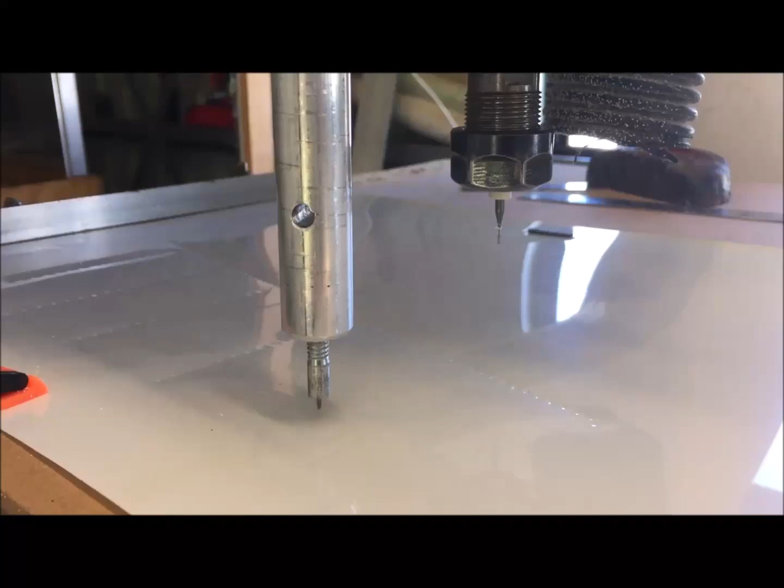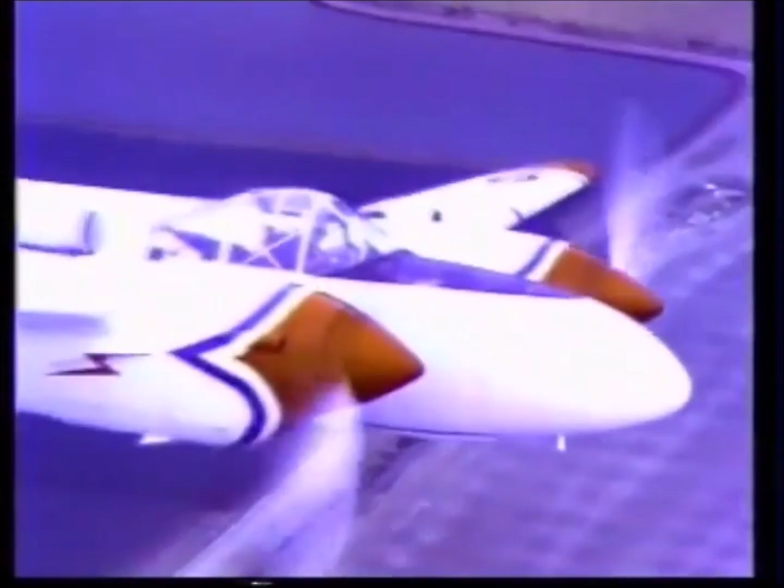I give you Lefty Gardner and White Lightnin'. How awesome is that? That's what this project's about. This is the 5th scale P-38 Lightning. It's going to be the White Lightning.

This we're actually making at the moment and about to make a mould of. And this video is about the compound panels and how we go about making the panels. All the flat ones will just be cut from a flat piece of plastic and go on. But there are so many of these really curvy, compound curvy ones, we call them specials. And this is about the process that we go about making them.

The basic concept is to extract the panel that we want to make from the 3D drawing and then create a 3D toolpath which gets cut on the CNC router backwards into a block of hard foam, and then that gets filled with plaster. So this is the foam that we use. It's just a hard foam from Bunnings.

So we pour the plaster, we end up with a plaster shape, and then we vac form over the top of this, and that forms the actual panel. Once the panel has been pulled, it gets trimmed to fit properly onto the plug into position, and the rivets have to be put on by hand using the machine, and then that gets stuck straight onto the plug.

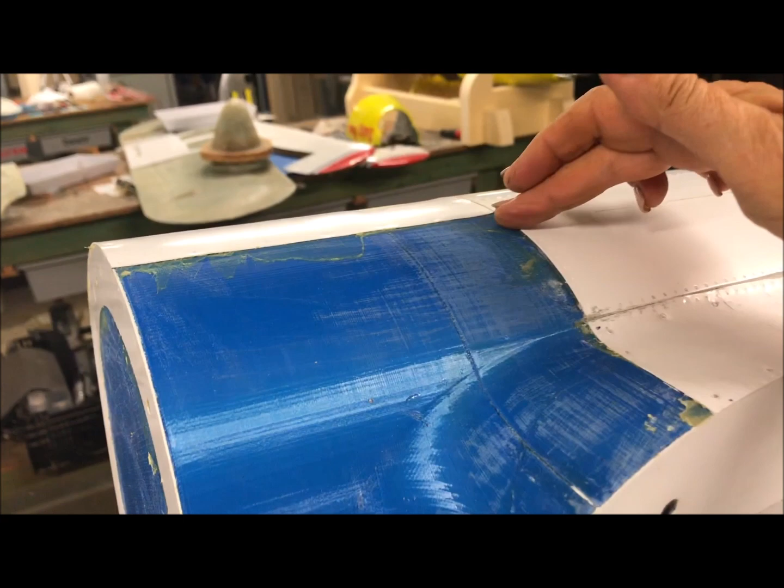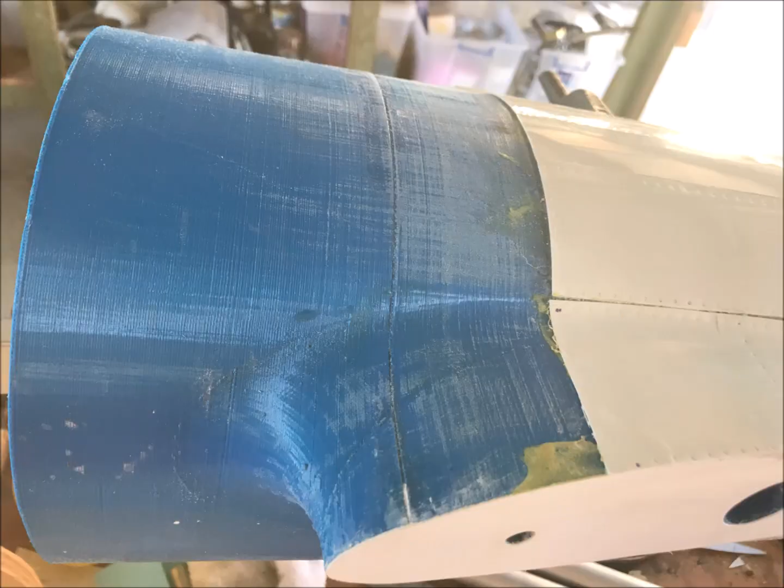The video is going to be a bit technical, and it may not be terribly riveting to a lot of you. We're going to be going through the process of using Rhino 3D, that's the CAD program that we use, and in particular MadCAM, which is a Rhino plugin that creates 3D toolpaths. So taking the extracted panel and showing how we create a toolpath for the CNC router to cut the foam.

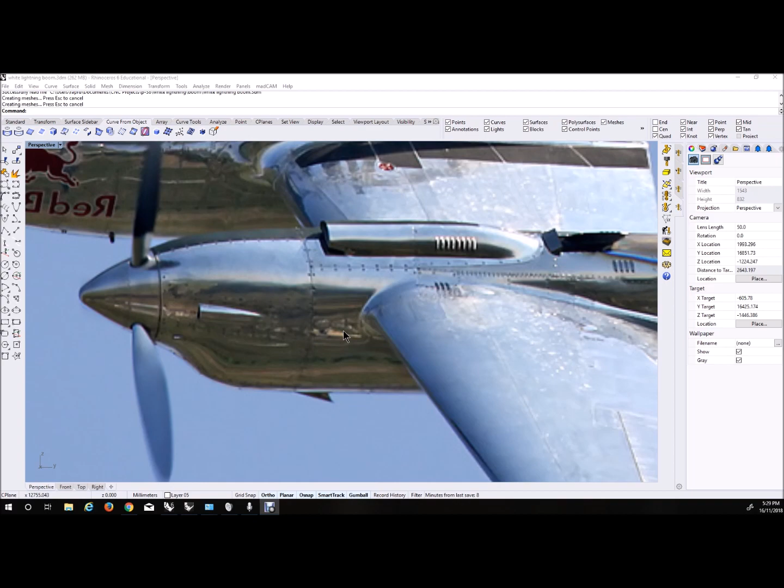And we've got a friend who's making a Grumman Duck in a similar way, and he'll be needing to put lots of compound curved panels onto his plug. So this is particularly to show him the process. So what we're doing is that panel. So there's the 3D model, and there's the panel there. So we've actually pulled it out here. So you can see how that panel's still the shape of that.

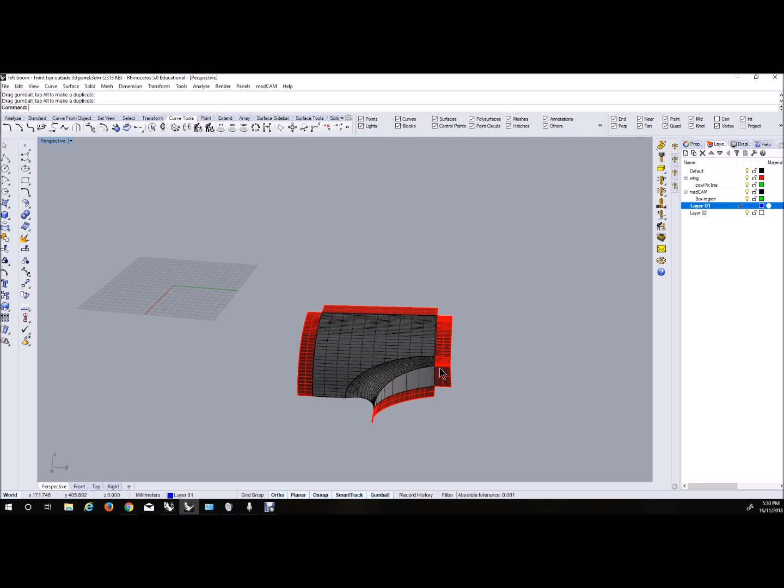We've added 20 mil to these sides already, just extended them out, so we've got a bit of pull area. So when we pull it, we've got trim area on the mould. Pull it as in vac pull it. So we're going to make a compound curved panel. To do that, we're going to make this toolpath to cut it backwards into foam to pour plaster into it. So that's what we're making.

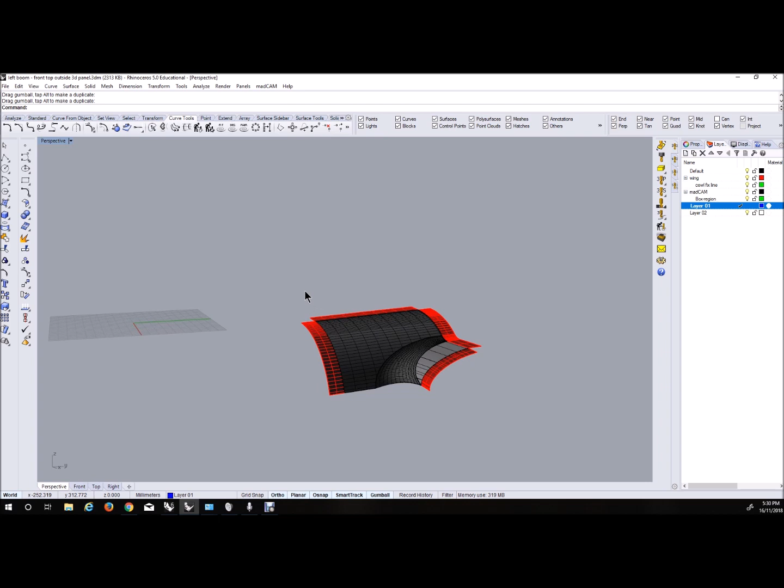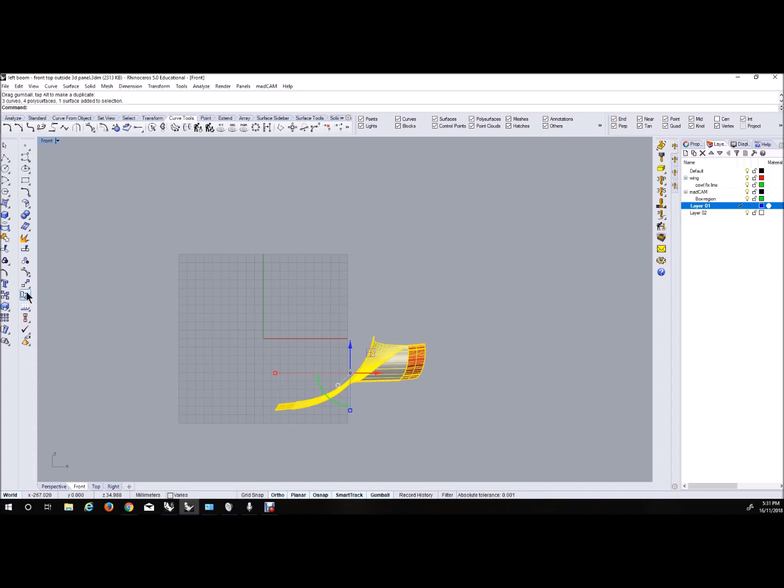So to make it backwards, we've obviously got to tip it upside down, because that's the shape that we're going to be wanting. Does that make sense? Yeah, that's the shape you're going to cut into the foam. So from this direction, we want to square it up so it's not wasting foam. We want to get it square with a block of foam, so something like that. And from right view, yeah, that's not a bad shape.

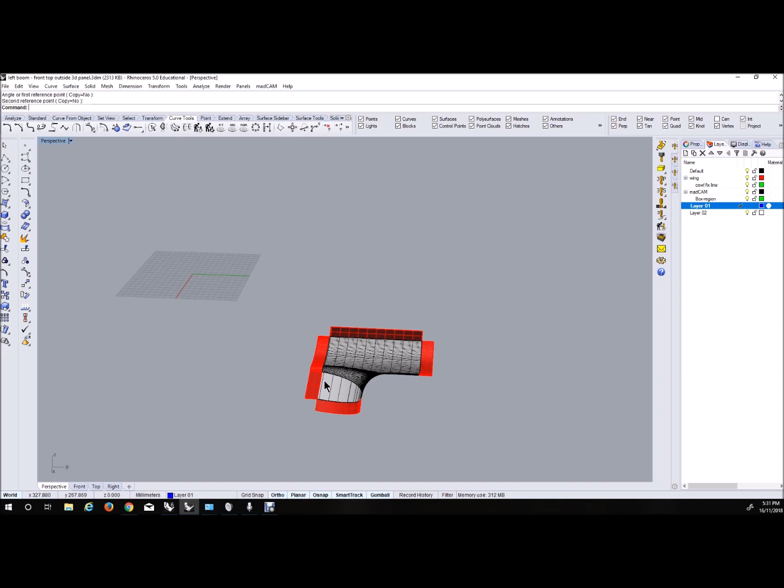So we've got that shape, but upside down. We want to fill the corners in. So we want to put a nice little curve around the corners, and maybe a big curve around this corner. So you want to fill the corners so that you're making a box that you pour plaster into. We're going to machine a flat surface into the foam, so it's got to be a nicely shaped bit, so it's not lumpy bumpy.

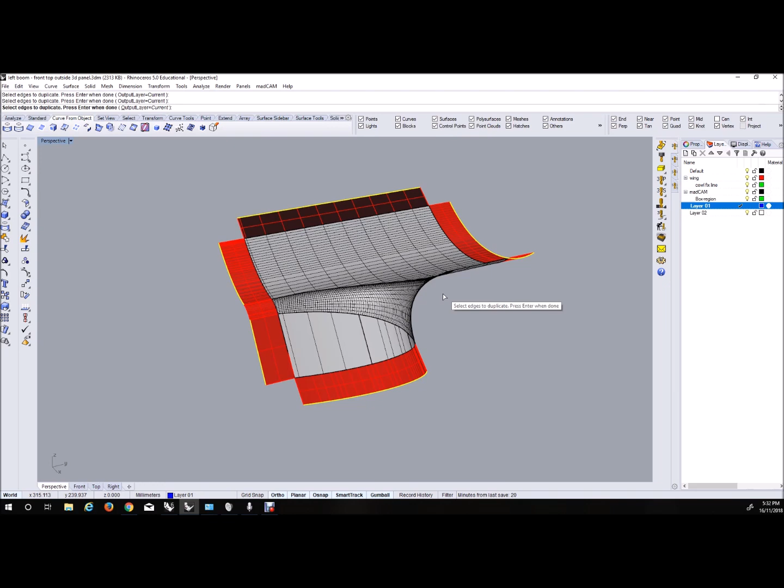So we'll duplicate these edges. There's a little ugly bit there, right on there. So we've duplicated those edges, joined them up, and then we can use arc blend. So from there, curve, we'll go up and just select curves in the filter. So curve, curve, puts a nice little curve in there, joins them up. So we go around all the corners and do that.

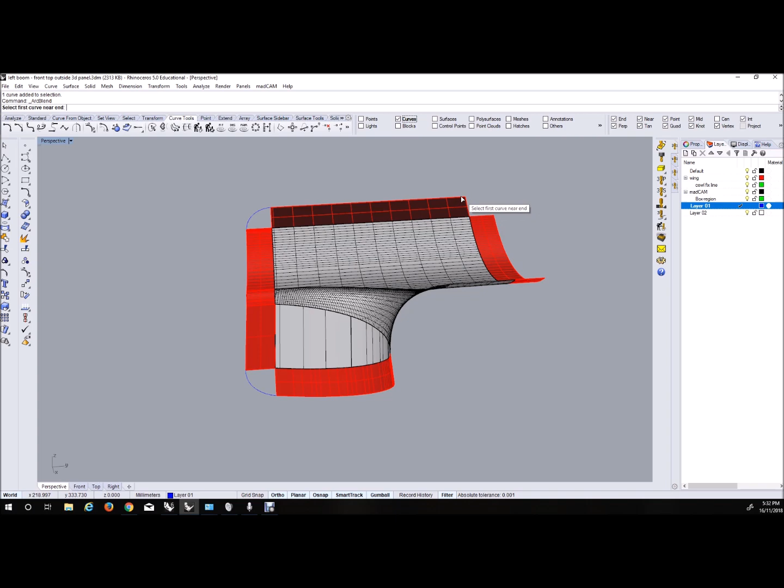Hit enter, reselect. This one's going to be a big curve. So we're going to go from there to there. Hopefully not too high. That's probably a bit high. Can you just turn on the points and push it down? Well, so many points it's put in there. No, we'll just trim it off afterwards, I think.

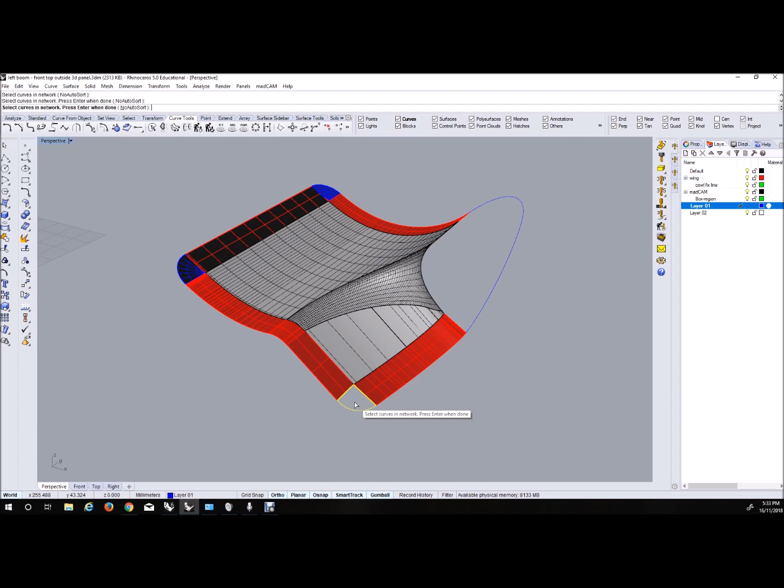So then we want to fill those in with surfaces. So surface, curve network, and you select, turn surfaces back on, that one, that one, that one, and it puts a surface in there. So again, make a surface between that edge and that curve. Done. So points define curves and curves define surfaces. So we're defining this surface with a series of curves, 3 curves.

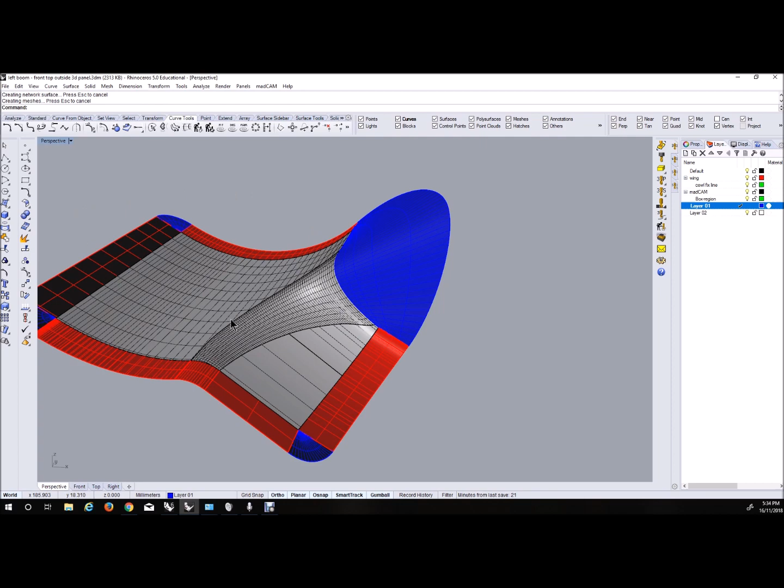And this one is going to be a little bit messier. So there's a surface, but we'll trim that down. So that's sort of the roller coaster ride that we want to cut into foam.

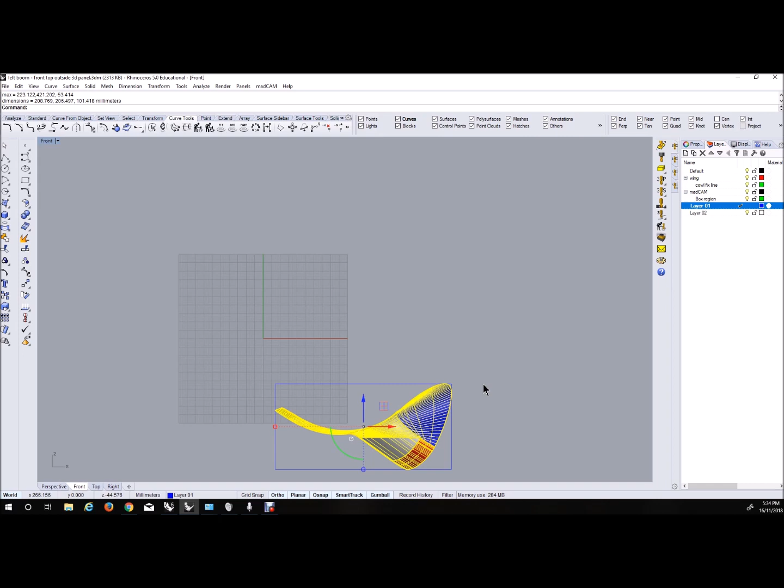Just to get an idea where its size is at, we will analyze bounding box, outputs, curves, and draw a box around it. You can see, so if we go to front view, that's way too big. The bit we're actually after is this black bit. That's just a lead out.

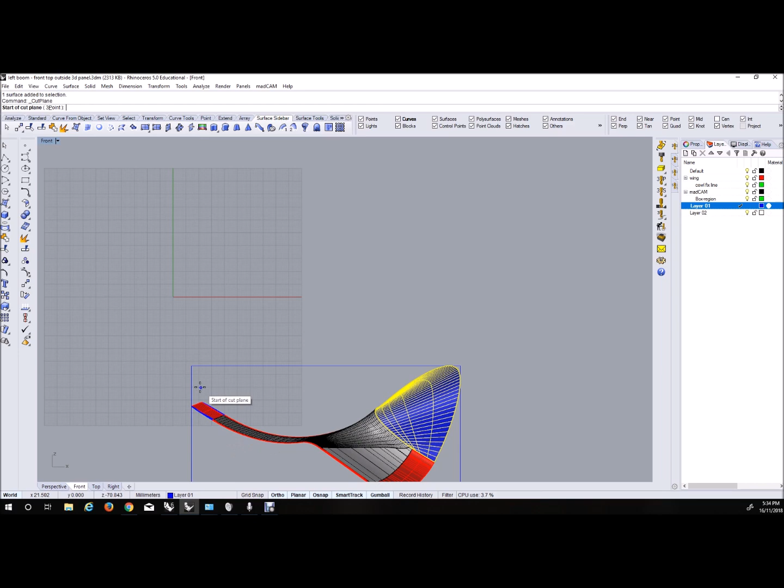So if we chop that blue bit to the level somewhere through there, so we want to chop that, so we go up and draw a cut plane. If we just go through there, that'd be maybe just a fraction higher. And then, using that as a cutting plane, so that's drawn a cutting plane through that wing,

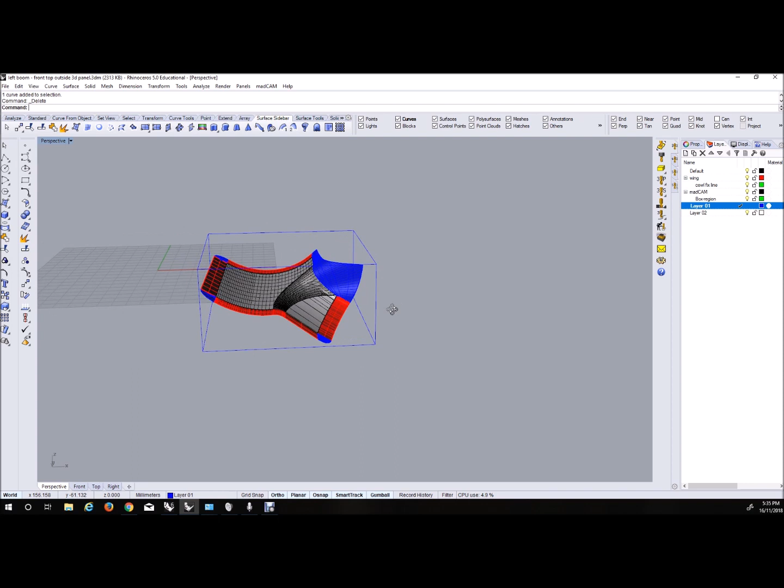and trim off that surface, and that curve will get rid of that, and get rid of that cutting plane, get rid of those daggy little bits. So that's the shape that we want to cut into foam. So that's what we want to cut, so we select it, and then we start into madCAM.

So madCAM, you work down the... And madCAM is? Machining. It's what's making the 3D toolpath. Yeah, it's an add-on to Rhino. It's a plug-in for Rhino, which creates 3D toolpaths within Rhino, and works within Rhino itself. So it's here as another menu. It's like a separate menu in Rhino.

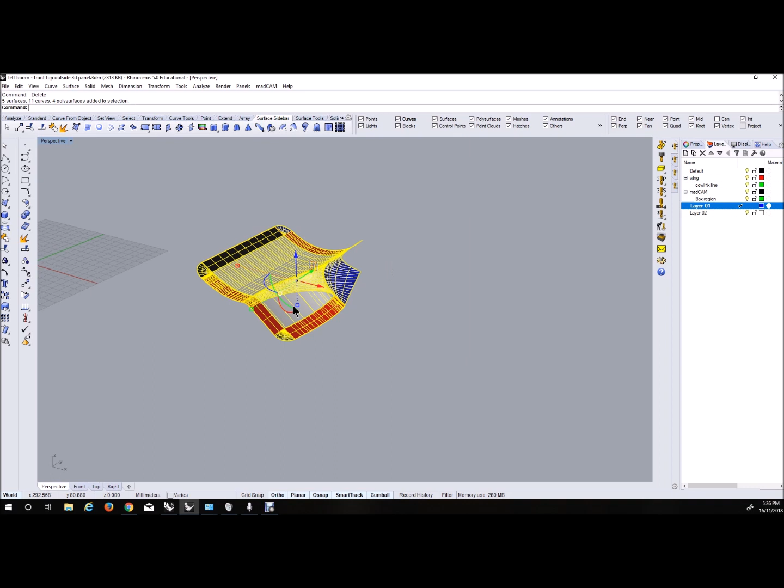There's 3, 4, 5 axis toolpaths. We're just using 3. So we've selected what we want to actually cut, which is this shape. So start at the top, select the model, and that's now drawn a box around it. For Rhino, for simplicity, our cut is going to go from world 0, 0, 0.

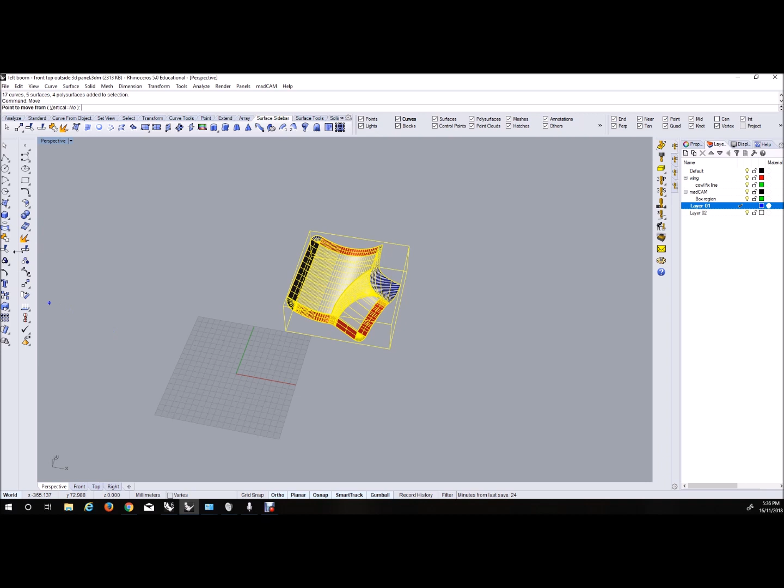So we can select this whole thing, go move, again, accuracy, snapping everything. So point to move from will be that point there, and we are going to 0. So on the construction plane, that is now set at exactly 0, 0, 0. So when we go to cut it, that's the starting point for our cutter bit. Will be at 0, 0, 0.

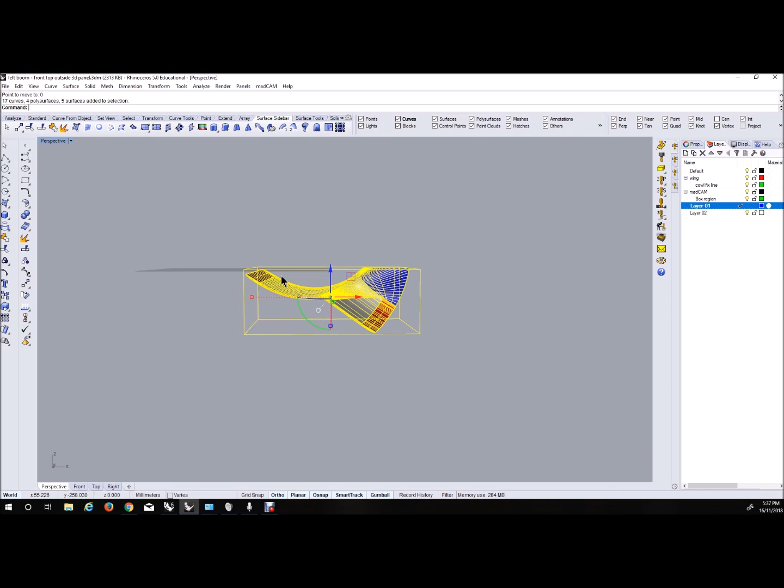So it'll go X positive, Y positive, and Z negative. It's going to cut down into the block. So that's the surface of the block, and it's going to be cut down into the block. So now that we've moved that, we've now got to do that again. So say that's the model, that's what we're cutting.

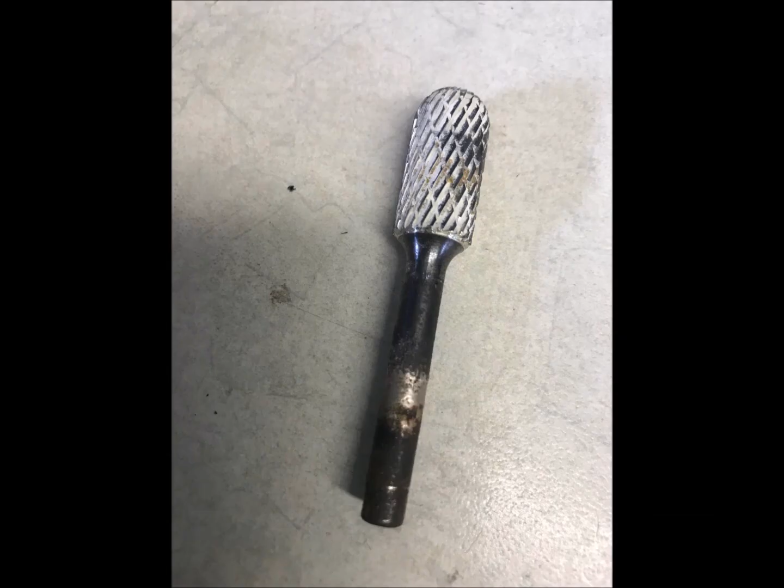Working logically down through the menu items, we select the cutter bit. We're going to cut this with a ball end 12mm. That's just a tooling choice, works good on foam. So we select our 12mm, it's going to go at 1200, 600 feed, 12mm diameter.

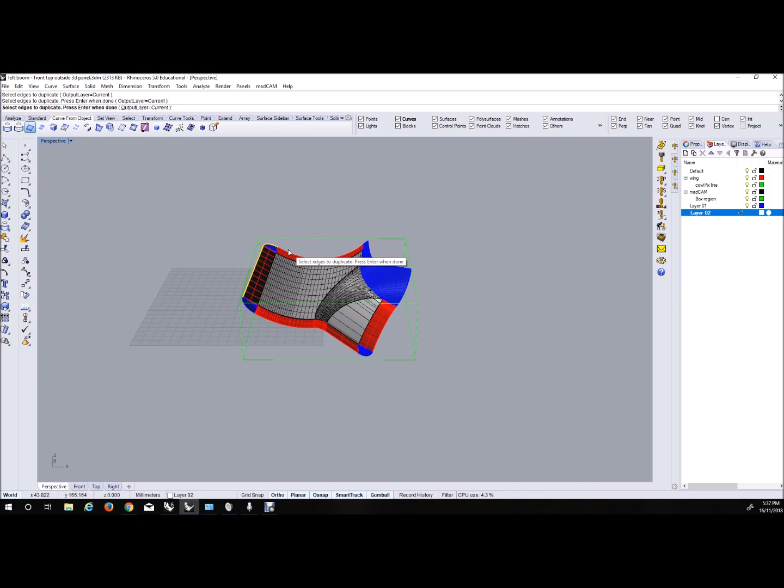Okay. We now have to give it a region curve, so it's not cutting outside what we want. We just want it to cut exactly what we've got. So we'll select another layer for convenience, and what we do is just zip around the outside, marking the silhouette of it. So we're just duplicating edges.

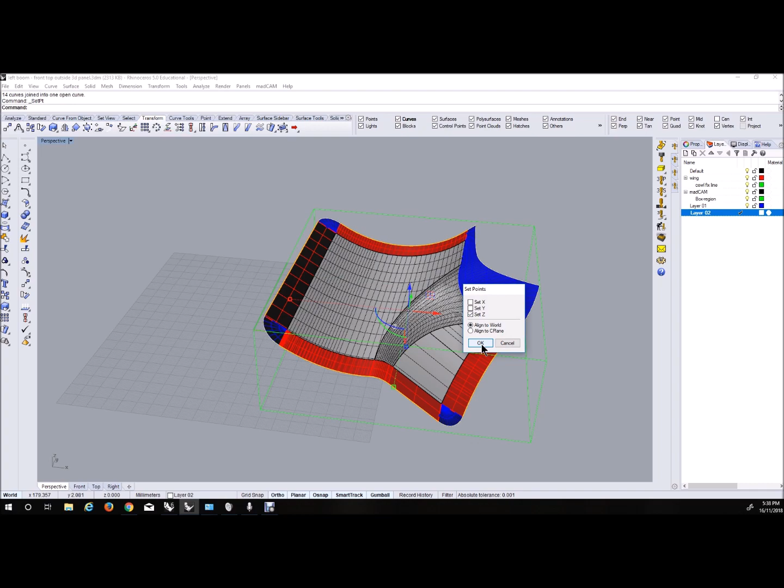Yep, duplicate edge, join them. It's an open curve, we'll get back to that. So, I didn't select that. Yes, I did. We want to bring all that now up to the top to form our region curve. So that's a transform, set points, set coordinates in the Z level. So we're going to bring all that up to the top.

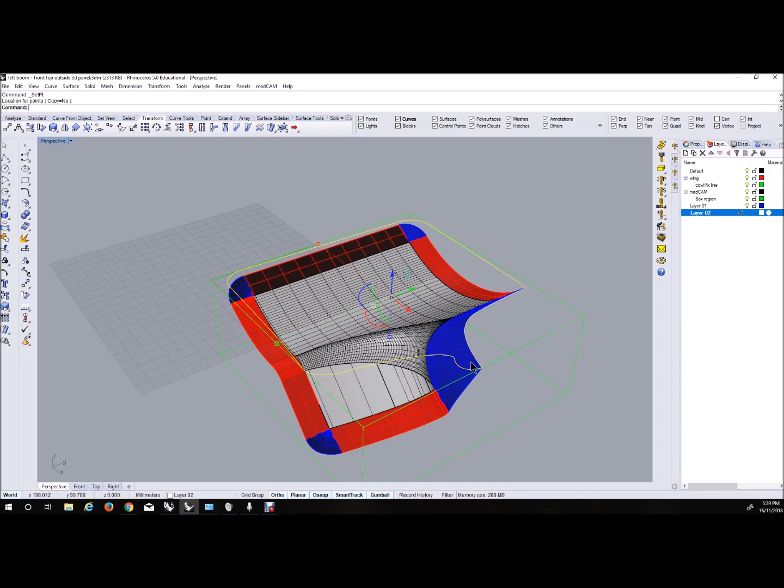You can see what that's done. It's taken that outline and compressed it in Z to the top. This may be an issue, getting a 12mm bit down there. We'll see where the toolpath goes. Not a big issue because we're not really interested in that bit, but we'll see what it does.

And you had to close it. We've got to close it. So the region curve must be a closed curve. So that curve there, to make sure it's closed, we go to curve, curve edit tools, close curve. And it's closed one curve by adding a line segment. So that's now a closed curve.

So we go across back to madCAM and go to select region curve. So this curve is highlighted. Select region curve, and that's now the region curve. So it'll only create toolpaths within that curve. So then we're not profiling and pocketing, we're doing a surface milling. So we bring that out, we can actually detach that, so we can keep it there.

So there are 3 steps that we're going to use there. There's roughing, Z levels, and planar. So if we click roughing, we're using a 12mm bit. So we're going to not step down dramatically, but we're going to hack away a bit. So 10mm step down, it's a 12mm bit, so a 6mm step over. And we're going to leave a little bit so it doesn't go right up to the edge from the roughing, 2mm. So stock to leave is 2mm.

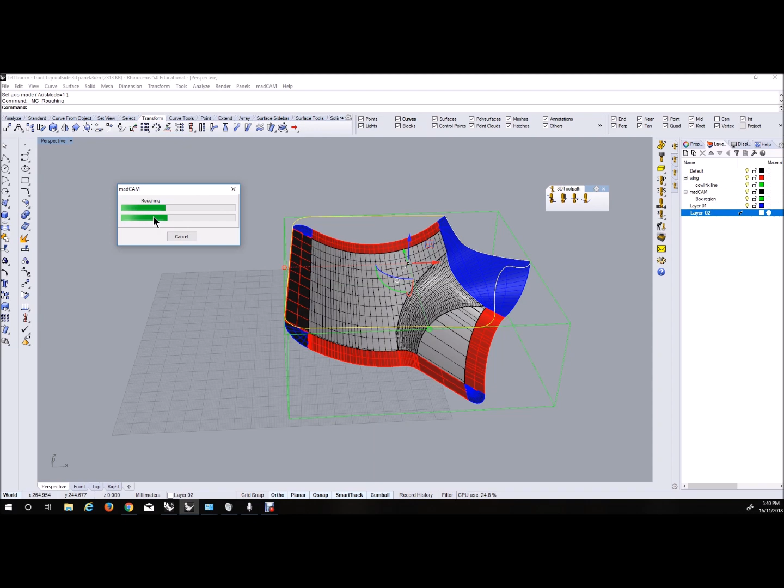And there is the roughing toolpath. So you can see how it's stepping down 10mm at a time, not going right up to the edges. So that's the roughing toolpath. So that'll take away the bulk. So if this green represents the hunk of foam, it's chopping away this bit, which is roughing out the shape.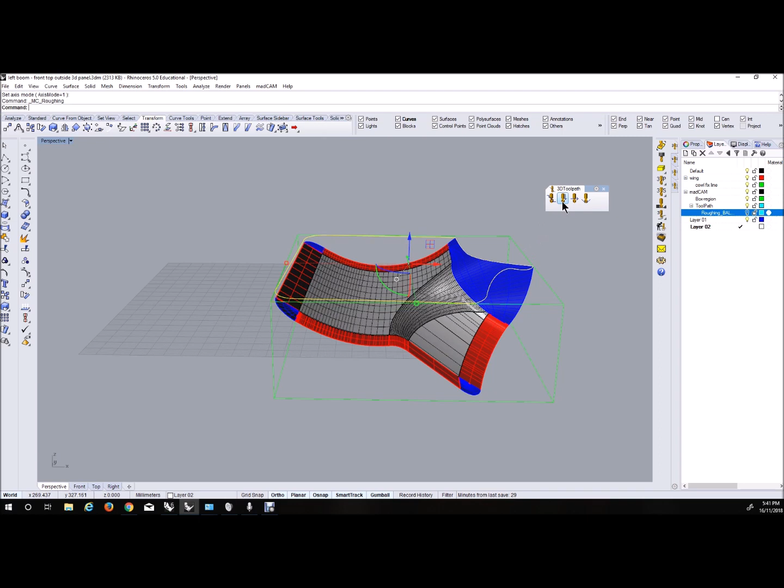Next step, you can just hide the roughing toolpath for the moment. The Z level, which will do basically vertical surfaces. 1mm step over, step down, that's reasonably fine. So this is a finishing cut of the vertical-ish surfaces. Stock to leave 0, so we want to go right to the edges. Step down 1 and we go yes. So I'll create another toolpath now, which is the vertical, which aren't that many vertical surfaces.

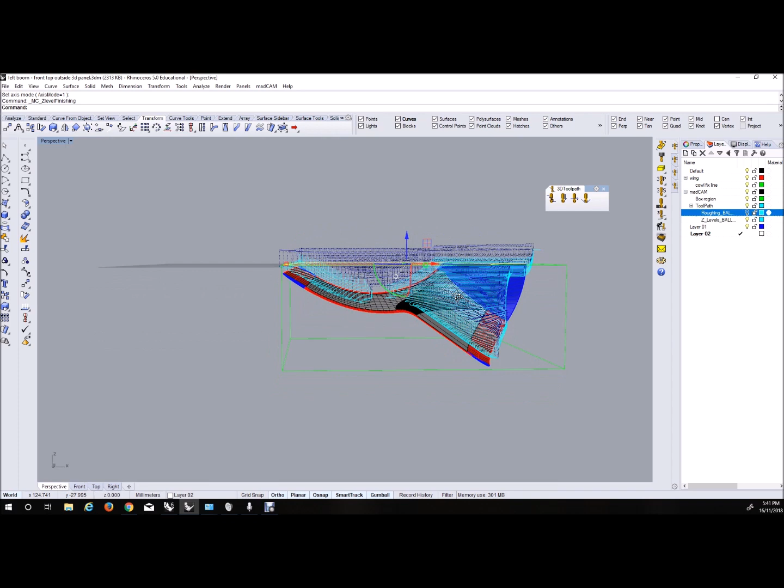And that's the Z level. So every level, starting at the top, 0, it goes down 1mm at a time, and comes up with a toolpath which joins all those levels together in a nice tight pattern. So it's stuck it over here, Z level.

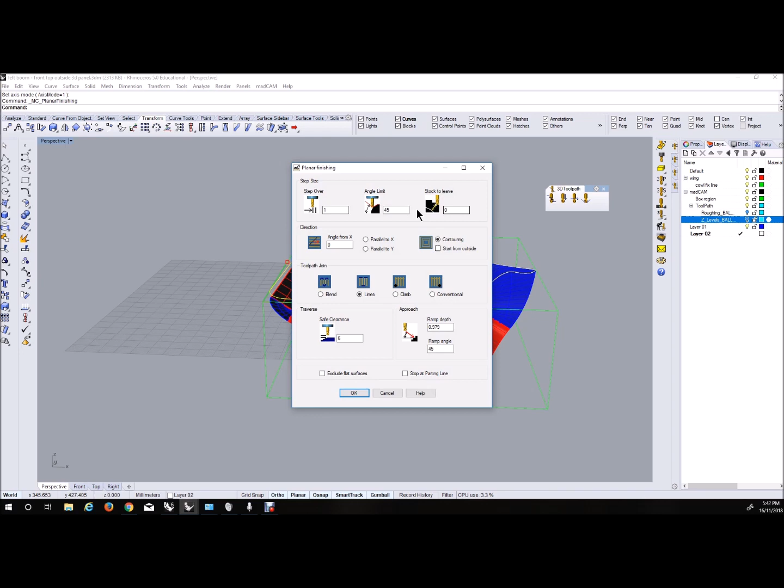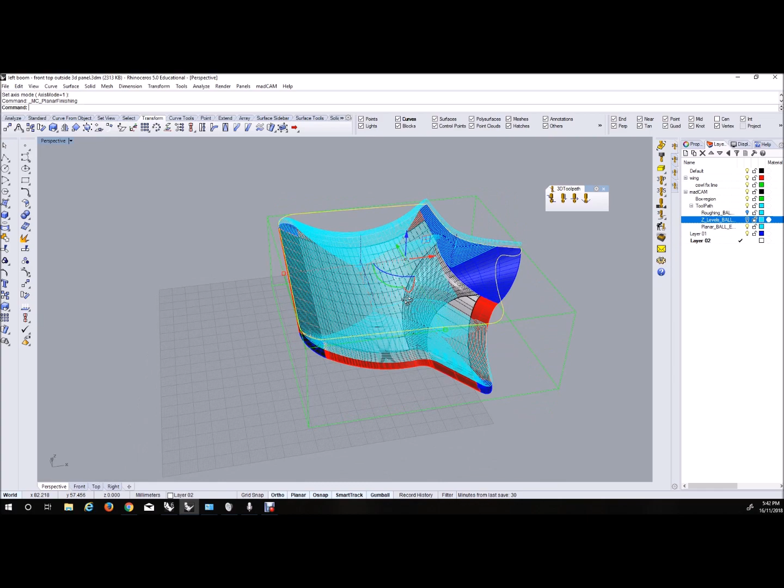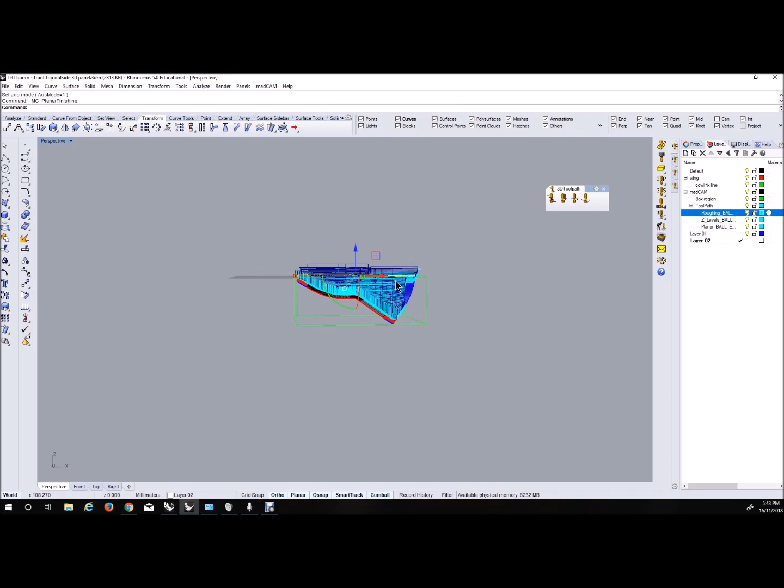We can turn that off and then do the planar finishing, which is the horizontal surfaces. So again, 1mm step over, 0 to leave, so it's going to machine the finished surface, go. Calculates the surface of the toolpath, and there's the planar finish. So when you turn that back on with the Z level, it's covered that whole surface just within the region curve. Couple that with the roughing toolpath, and that's the complete toolpath to cut that shape.

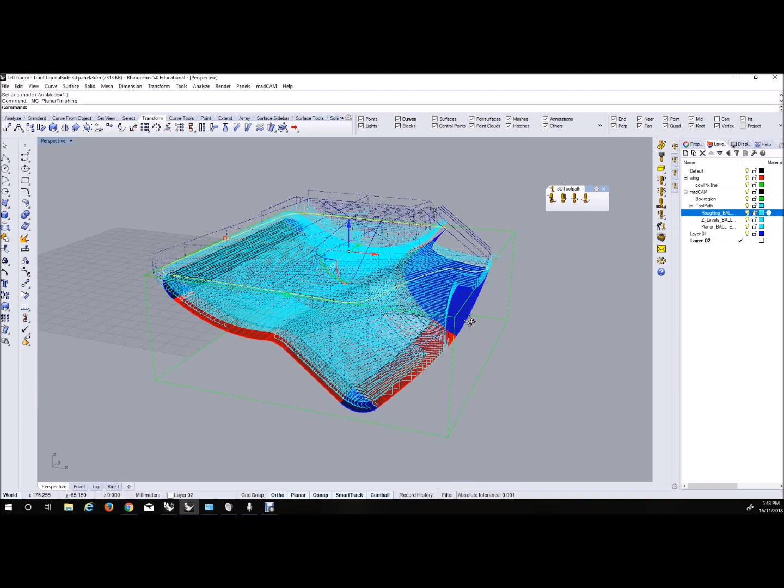So the light blue is the actual cutting. The dark blue are the rapids, fast movements between cuts. So now that we've created that toolpath, we post-process it. We turn that pretty drawing into a G-code, which Mach3 can then get the machine to cut it out.

So this is the post-processor. So making sure that these layers are all visible, because it'll create a toolpath for the visible layers. If they're all on, it'll create a toolpath for it. So post-process it. It's a 3-axis machine we're cutting on, and we're using Mach3 metric.

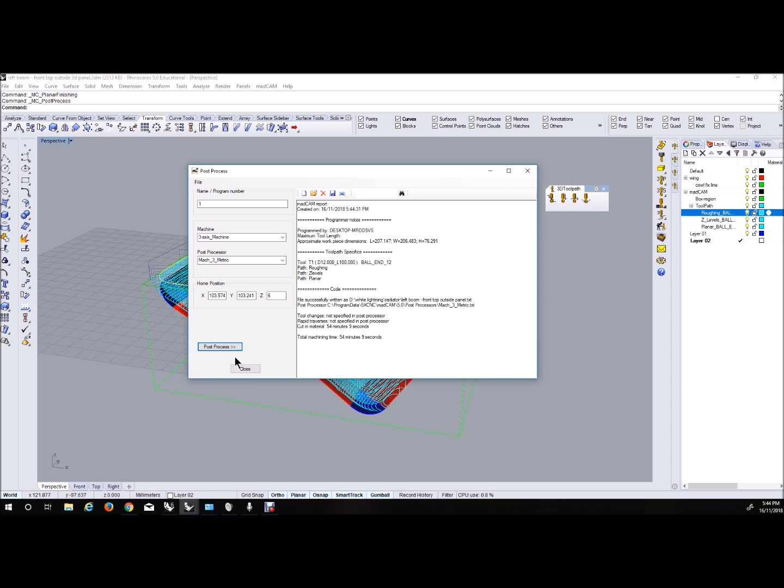And you go post-process. We're going to give it a name, which is the left boom, front, top, outside panel. And save, and there's the details of the G-code for it. It's going to take 54 minutes to cut. Job done. Close. Take that G-code over to Mach3 and start cutting.

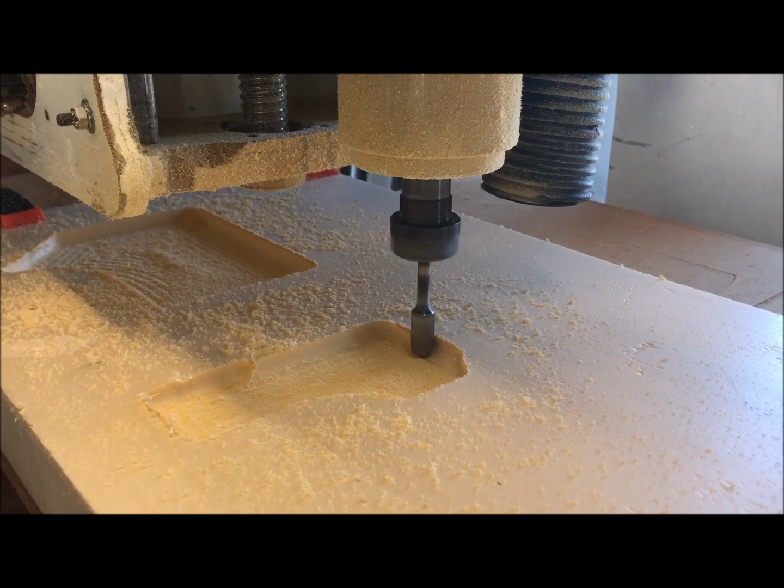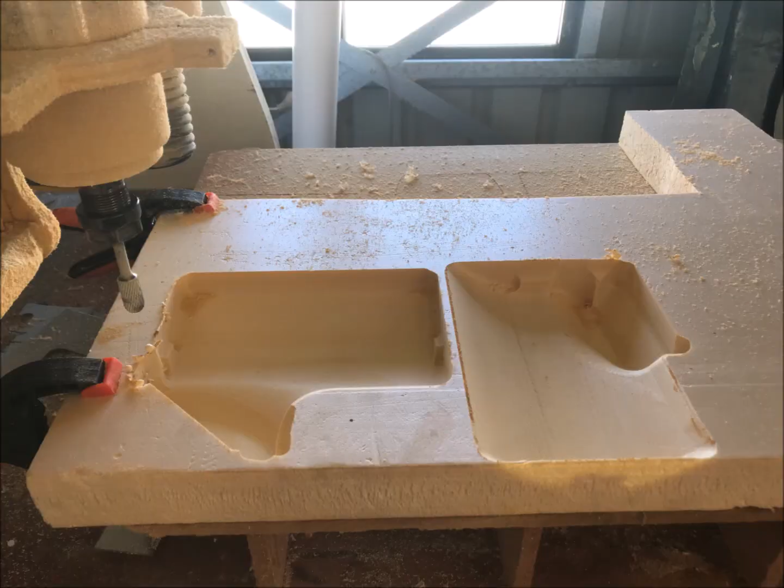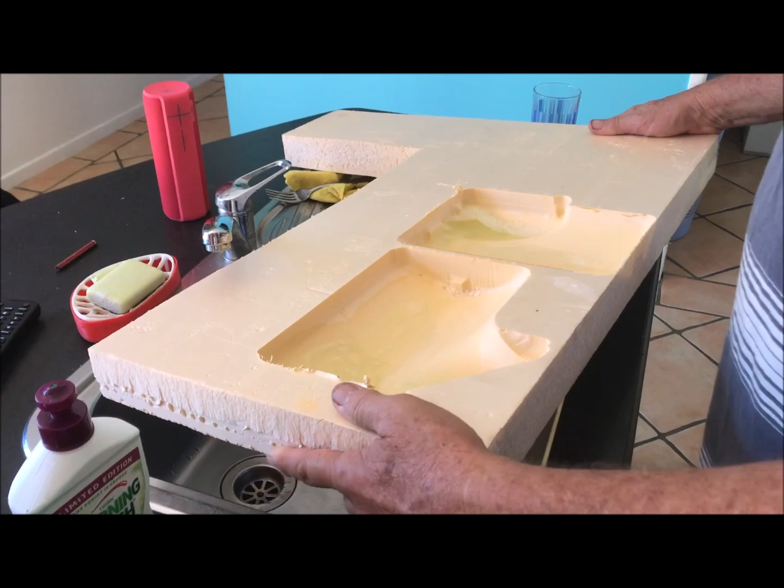We now have the panel shape cut reversed into foam, so now time to fill this with plaster. So by adding some soapy water, just a squirt of dishwashing detergent into a glass of water, this gets rid of the air bubbles on the surface of the plaster piece, by breaking up the surface tension in the foam mould. And not just a mist of soapy water, but really soak it and give it a good rub into the foam surface. That'll make it come out really smooth instead of all full of pock marks and holes, which take a lot of filling and smoothing.

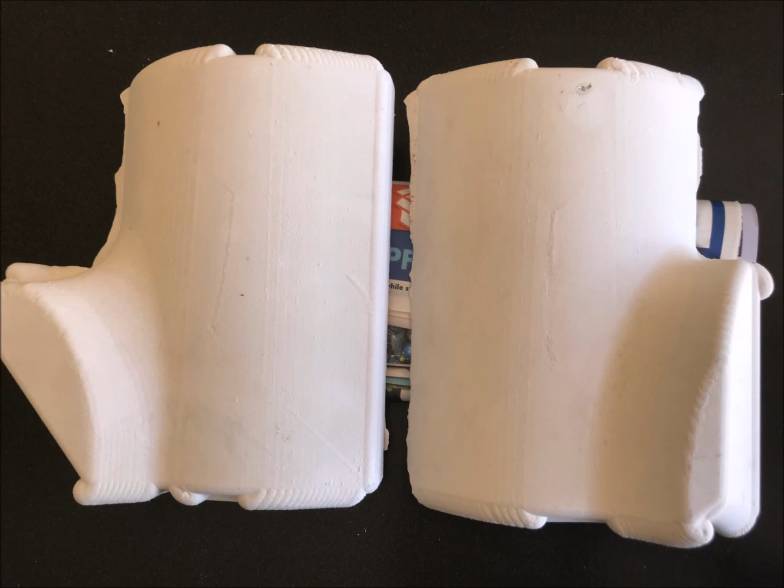And then just a quick sand with 400 wet and dry, used wet, and it's smooth enough to vacuum form over. Mix your plaster, pour it into your cavity and give it a bang to help get rid of trapped air bubbles and to settle and level it. We use an oven element to heat the plastic, but just use the heat gun to get right to the very edges and the corners on the bigger bits of plastic so that it heats really evenly.

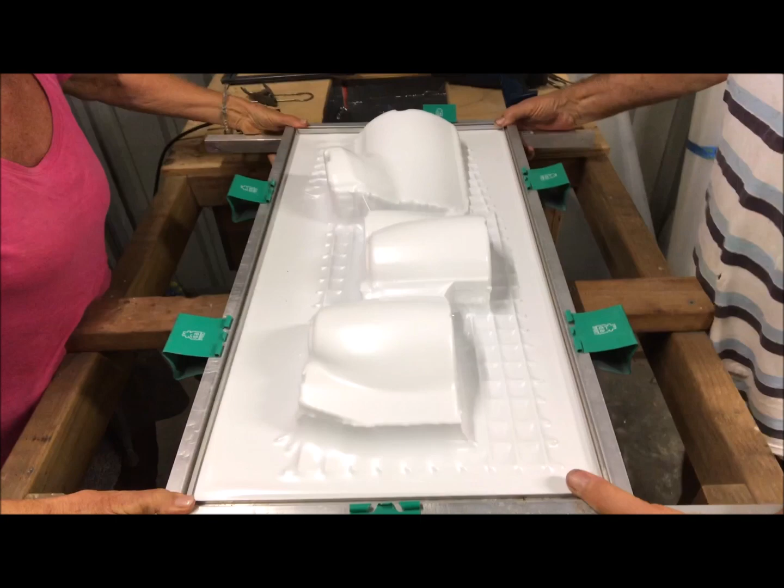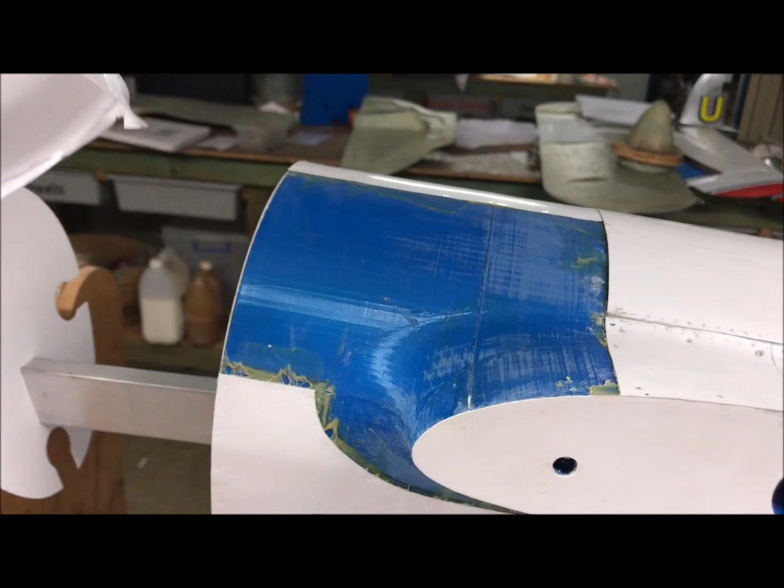Remove the pulled panel from the plaster plug, roughly trim it up and check it for fit. Ta-da. How good is that? That's going to fit into there really neatly. The panel then gets really finely trimmed for an exact fit into position, matching the surrounding panels, and then the rivet details embossed into it.

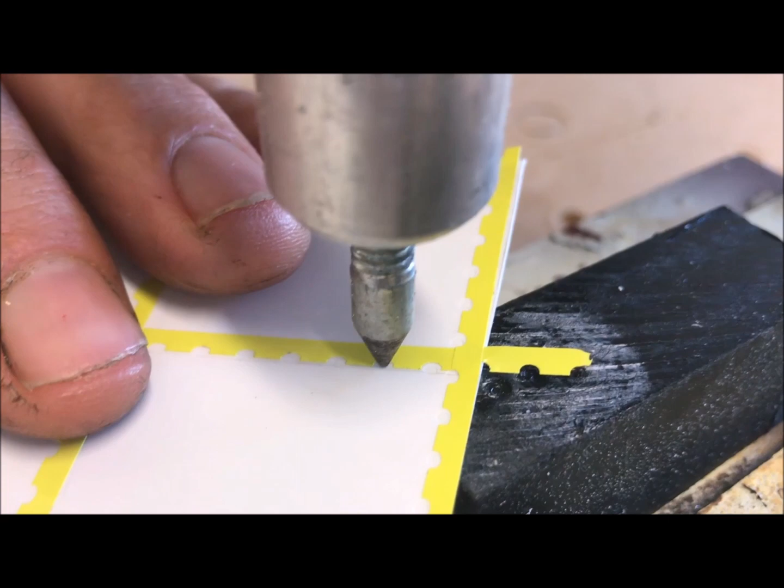We use the CNC router by manually positioning the panel under the rivet making tool and then using a handwritten single rivet depression making G-code. A rivet's embossed into the plastic. And then manually line up the next position and repeat, and so on. To keep the rivets on the line they're meant to be and evenly spaced, a vinyl sticker is cut to the correct spacing and stuck on as a template.

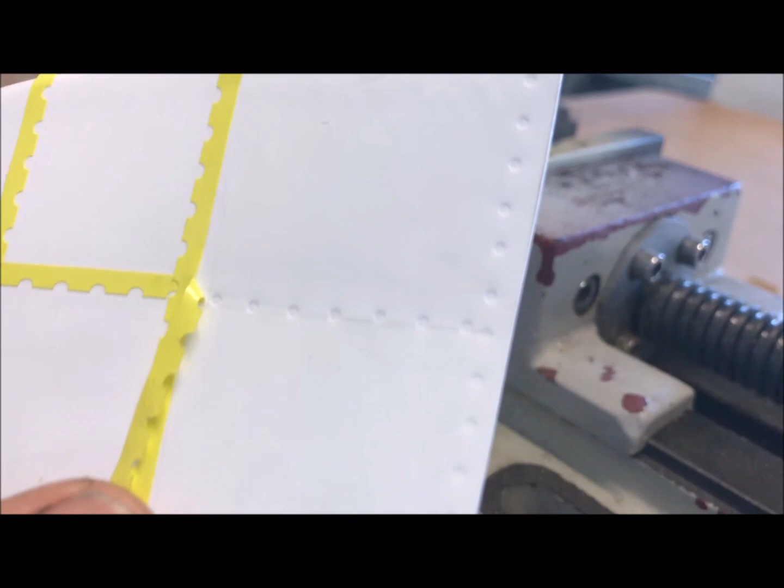And then finally, the panel can be stuck into position on the plug. Clean up all the glue, finally sand and then polish with a polishing compound. And there you have it. One panel finally done and dusted. Just have to repeat that entire process from the start for every special panel.